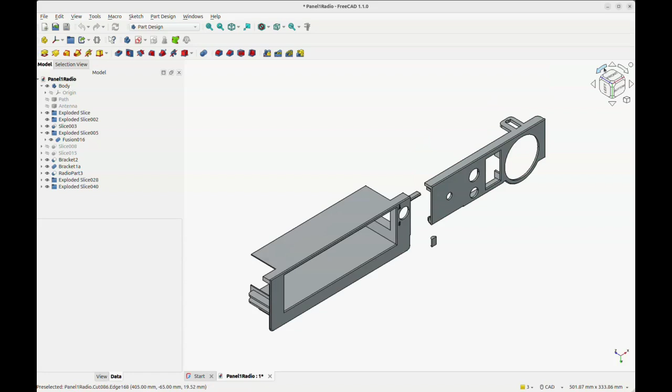And then the switch panel, nothing a huge amount to say about that. It's got some strengthening behind it, so if we just rotate it around, you can see it's just got bits behind it to give it some strength, and then you've got the bracket up there to just put a bolt through from an existing mount hole, and that's pretty much it.

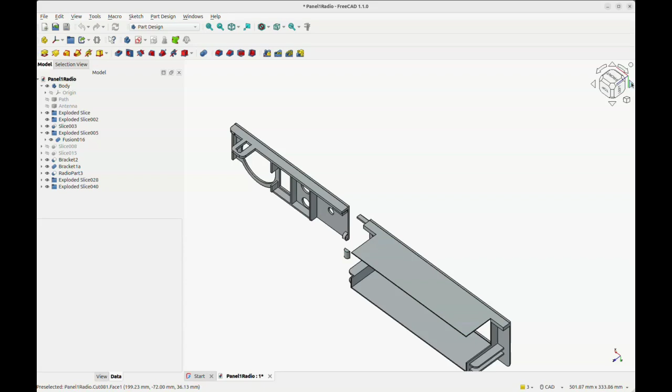The two are linked together. There's no direct support at this end, but there's that little rod I put on the end of the face which goes into a slot on the switch panel, and then I've got these little hoops I put on there, and a pin goes through, glued on one side, and that seems to hold it together reasonably well. The alignment isn't too bad yet. You can see a line, but it could be worse.

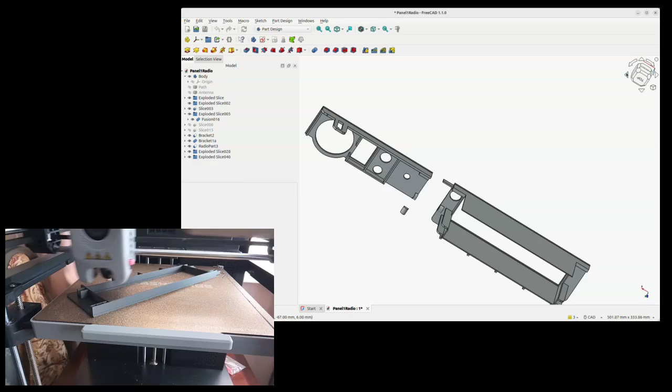And then the whole lot was just 3D printed, and that was all to it. All this took me a long time, and several iterations to get it right, but I got there in the end. Now I just can't decide, as I say, whether I like it or not, but I shall keep it on the car for some time, and then hopefully it'll grow on me. But I think that's all for this video.